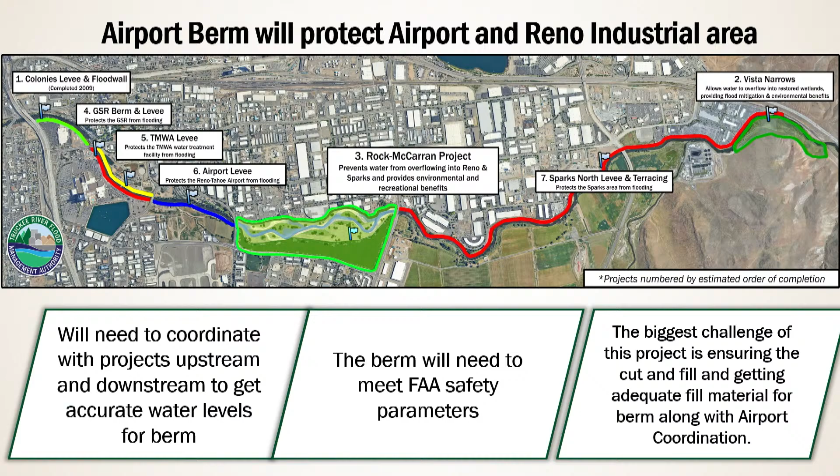Next slide, please. The selection process went out, I believe, on January 6th. In the end, there were 6 firms or teams that applied for this. We had a 7-member team, including one from the airport, so it wasn't all TAC members, that went through all the statements of qualifications and scored them. We found 2 that were a little higher than everybody else.

Then we came back and did an interview on the top 2, and we had a unanimous decision for the firm we chose, which was Kimley Horn. That firm's team also has HDR as well as Crawford and CME as geotechs, and it was very strategic how they put together their team.

CME is the primary geotech for the airport, so they already have all the OKs and know how to work with the airport. Crawford will do a lot of the analysis, so that was smart. And Kimley Horn actually has a large staff of airport specialists here in Reno that do work throughout the West, so they were very adept at this sort of project.

So that's how they won the competition. They also have experience downstream, whereas Crawford has done Rock McCarran, and upstream, HDR is involved in the GSR project. The SOQ asked for an approach, and that approach was matched by what they did in their scope, so the scope matches the SOQ quite well. After negotiations, we came up with what we came up with.

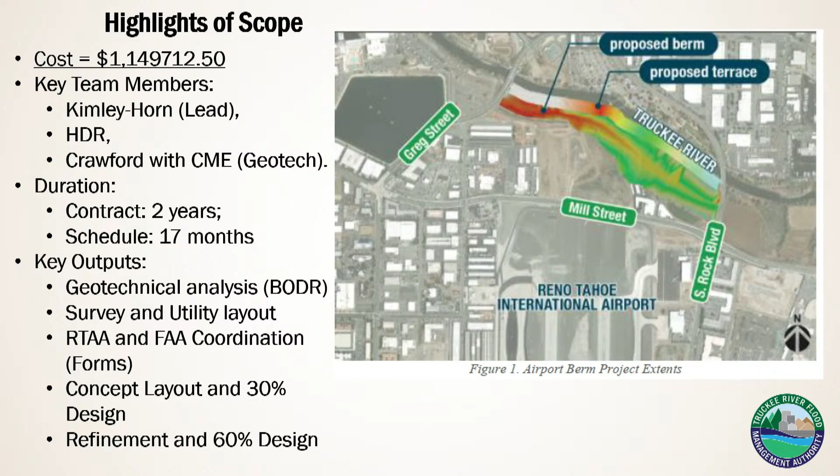I think RTC is surrounded, so we'll help them out.

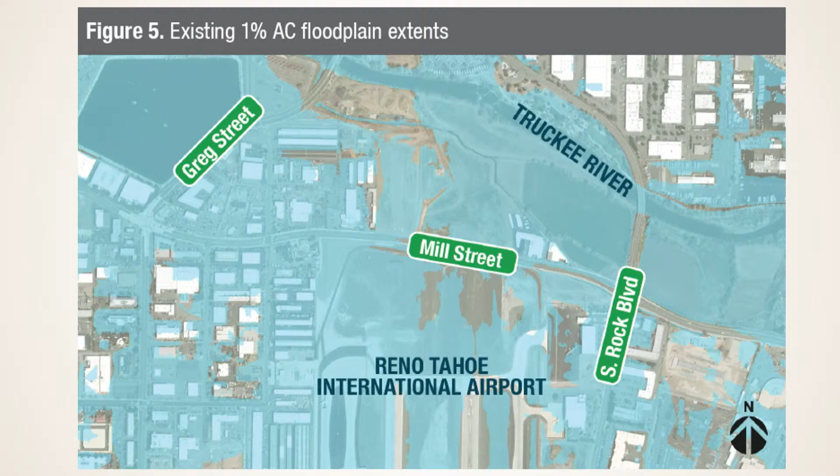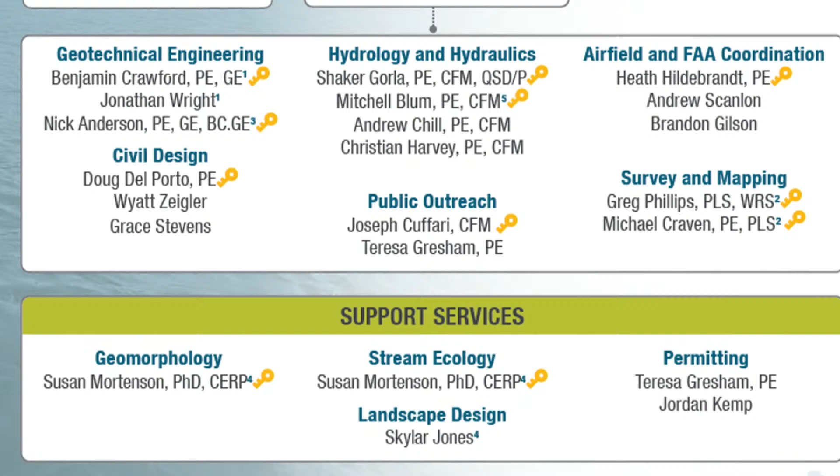Anyways, next slide please. So this is the organizational chart of this project. I don't want to go over it, but it's led by Kimley-Horn, and there is a lot of talent on this team with Truckee River experience, like Crawford, like Mitch Blum from HDR. Heath Hildebrandt has got years and years of airport experience. Like I said, they work throughout the West from their Reno office. So it's kind of a very strong team for this kind of project.

Next slide, please. The schedule is, once again, about a 17-month schedule. It's laid out. We do not have a lot of public interaction like we did with Rock McCarran, because it's kind of behind the gates. It's just building a berm. There is no recreational component because it's behind fences and gates. So the whole thing is really making sure the airport's okay with it, letting the public know what we're doing, and making sure that we have the protection levels right.

A lot has been said about, well, we're spending so much on recreation on Rock McCarran. Well, we're not on some of these other projects for various reasons. So when you average it out, we're not really spending that much on recreation for the whole project. That just came up the other day. I was like, well, that's something to think about, that you can't just look at Rock McCarran, you have to look at the whole project.

Next slide, please. This is the budget and the different components of the budget. I know I put this in the staff report and everything. The big ones are the geotechnical and basically the civil - over half the budget is basically on those two things. And there is a pretty strong component on hydraulic modeling.

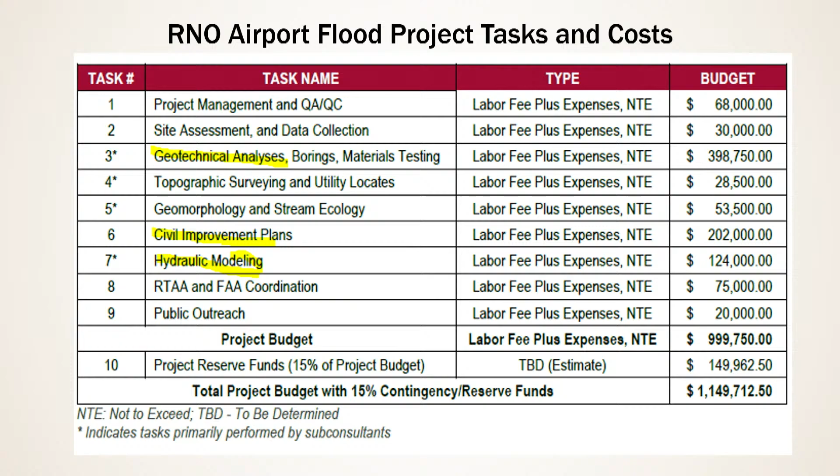This is a not-to-exceed account, so it may not get that high. I wonder if hydraulic modeling will really go that high, since we've kind of solved that for other projects that surround this project. But we'll see. And so anyways, this is what we have for the overall budget.

Next slide, please. So this is it. We have a possible motion. This is from our staff report with adding the dollar amount, that's all. And I'll take any questions about this. Thank you, Director Robison. Are there any questions? Anybody? Yeah, I'll just make a comment.

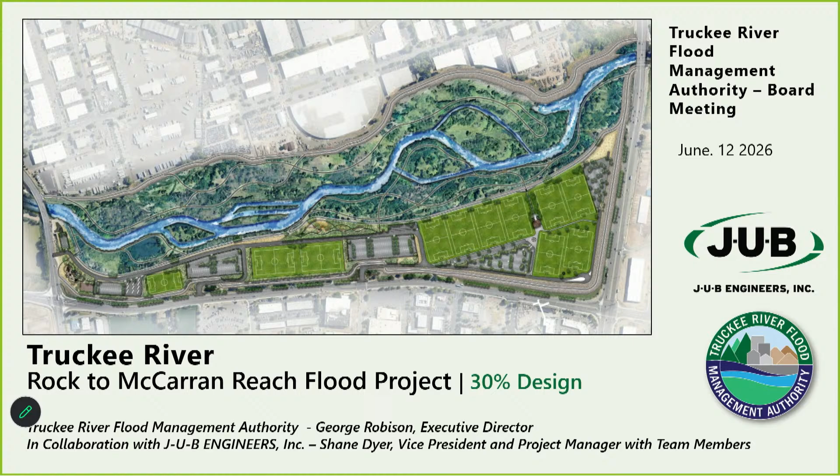I'm going to just take the first few slides and then I'm going to hand it off to Shane Dyer, who is the project leader on this project and also the vice president of JUB. You have them like, bunches of them, okay.

Next slide, please. So the agenda here, and I want to just state the goal: the Rock to McCarran Reach Flood Project is to provide flood mitigation for the 100-year and 117-year event. And because we talk about the park all the time, that seems to get lost in the equation. That is by far the most important part of this.

It protects both the North Bank and the South Bank. It protects the airport, Reno industrial area, and the West Sparks industrial area. It protects a lot. And in addition, we are trying, while we do this, to spread the river out to enhance habitat, geomorphic function, and provide recreational opportunities as well. So we're trying to do multiple use here, but without killing the budget.

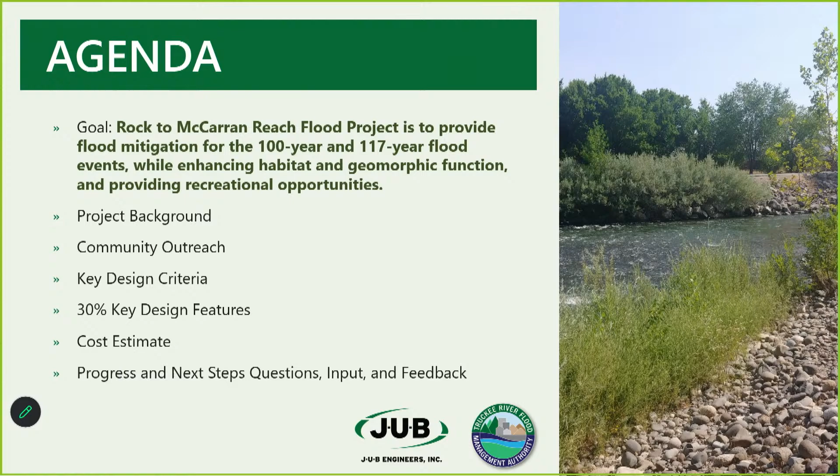Next slide, please. So the alternatives analysis was already done. We went through that. There were literally multiple hundreds of scenarios run, and we had multiple meetings. I'll show you on the next slide how much public input we had. And we came back with a preferred alternative for that.

Then we did the park, where we had two major approaches, and we came back with an alternative on that. The alternative was to have a corridor to move the river for the river part, and in the detention basin, a recreational complex park, and in the river corridor part, more of a natural park. Next slide, please.

So this is the community outreach. I know it's small because there were so many of them. But you can see that even all the way down to the very end here, just on the 3rd of June, we had a community outreach workshop, which used to be our working groups. We had literally many technical advisory committees with public input, working groups, and then an in-person meeting back in 2025.

We received hundreds of comments. It's well over, I believe it's well over 300 at this point when you add all the comments together. And there are themes in those comments. One was there was a real hunger for some sort of park there that had ball fields, a recreational complex. There was also concern for environmental impacts. What we attempted to do with our analysis and everything was to balance those concerns with that hunger or need and come up with something that was cost effective. That was our goal once we heard all those comments.

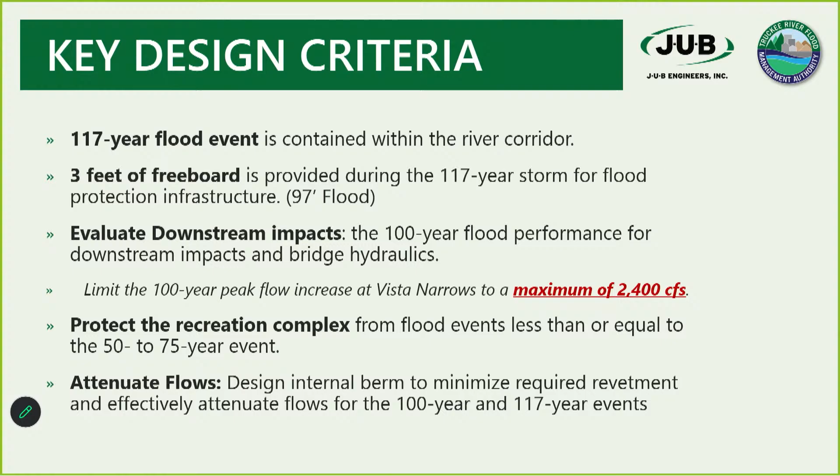Next slide. So I'm going to go over 4 different key design features: the river corridor, the environmental, the transportation, and then get to the nature park and recreation design.

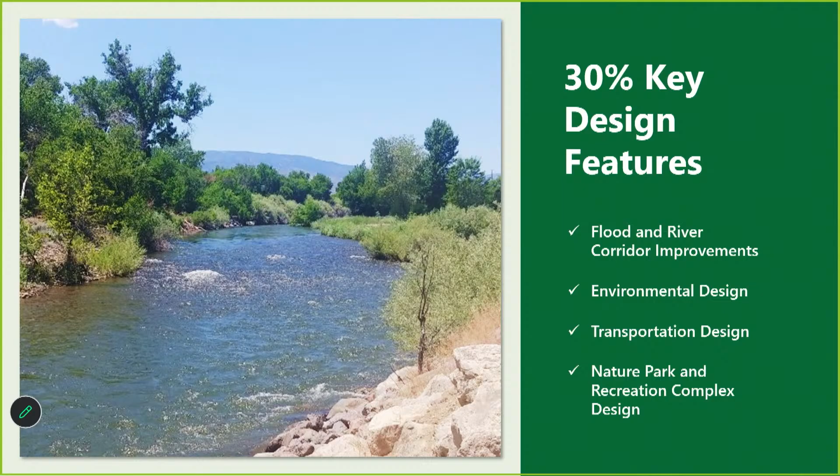In the flood river corridor, the main components include the levees, which have 3 feet of freeboard—I'll show you more about them—the internal berm, which separates the river corridor and the park area, and the geomorphology, which was a huge portion of this: understanding how to create the plan form and geometry of the river, the correct width of the meander belt, and all the geomorphology that comes with that, then optimizing it.

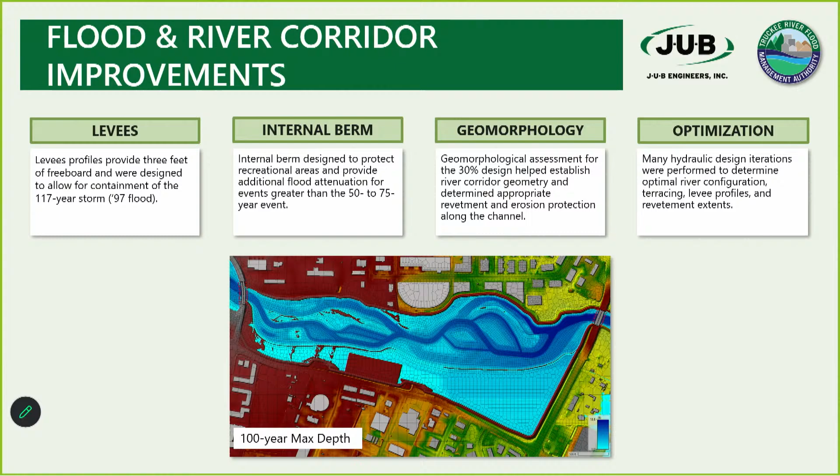We went through tons of iterations to make just the river corridor work. The river corridor is between the internal berm in the middle and north up to the levee against Sparks—so wherever the river is, that's the river corridor.

Stop real quick—the internal berm, where is the walking and biking path? Is that on the north or the internal berm? Both—we have paved paths on the north levee, the internal berm, and the south levee. We'll show some slides that make that more visible.

Next slide. Let me take this. Yeah, go ahead.

I've worked as hard as I can to keep flood walls off this thing, okay—near the rock bridge. Could you turn on your mic? Oh, sorry, please, thank you.

Near the rock bridge, for about 300 feet, there's a situation where it's super crowded. We have a major power line that comes down right there in the middle of everything, and private properties come up really close.

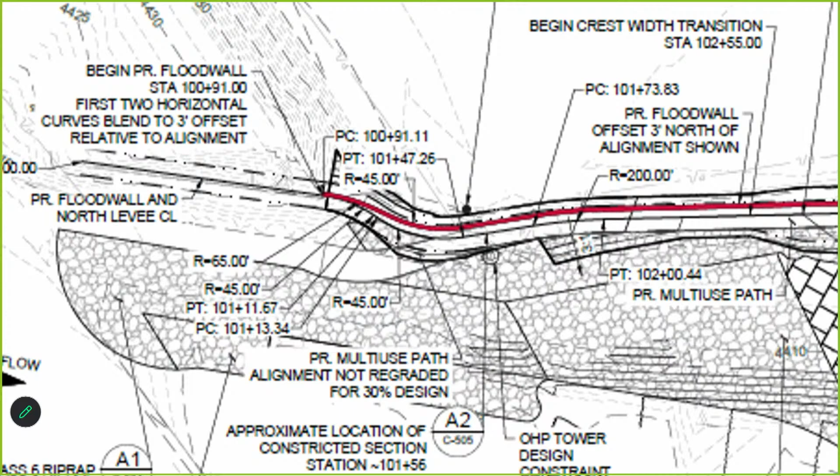So we have all this stuff going on, creating very little room. Originally they had it at about 500 feet. We had a meeting and said we need to really engineer this and make it as short as possible. It's also, in many cases, a hybrid levee-flood wall, so it doesn't pop up too high off the levee—but right by the bridge, for 300 feet, there is a flood wall.

When we do the TRFMA design, there are some places you just cannot do it without a flood wall, against some of the very tight areas where they have the canal and a pond, their major pond. We're trying to build off those with a slight flood wall. There's only a couple of places here and there, but we're trying to minimize them to a few hundred feet here and there over the whole several mile length. But I can't say I can do no flood wall nowhere.

This spot just wasn't able to avoid it. So you know what my issue is—we have this beautiful river that runs through our city, and if we flood wall it off, then we don't have access. That's definitely something we don't want.

What's cool about this 300 feet is there's no access issue. It goes right up against private property, and it goes right up where the bridge is, and there's no access there. The trail is on the inside of the wall, on the riverside, so you see the river, you don't ever get behind a wall. The long-term plan is to put housing along this river, so walling us off is not a good idea.

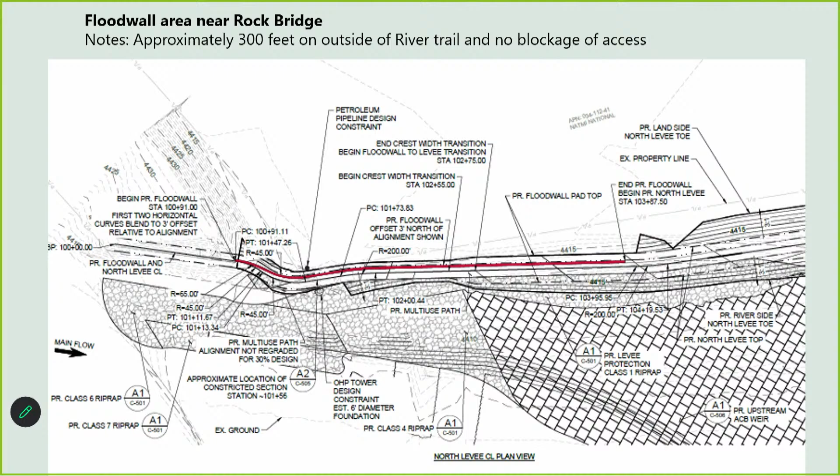So the way we did it in this particular section, we did a small levee and then a little flood wall above it—we couldn't fit a big one. It's big enough that probably the average person could step over it, 2 to 3 feet of just wall on top of a berm. That's good enough for me—if you can step over it and have access to the river, I'm good.

I better double check, but I'm thinking 2 to 3 feet, not 5 or 6 feet—not in this spot. And like I said, even there, it's for 300 feet, there's no access. Even if it was just a levee, there's no access from the north into that area because of the private property and the steep drop from the bridge deck.

All that could change in the future, though. Once this is in, it's in forever—well, let's hope so. One of the big problems is that FedEx's property is right there, and if a developer came in and wanted to replace that portion of levee for 300 feet and remove the flood wall, it would not be hard—they just need more space. So if they owned that land, it would be no problem for them to replace 300 feet of levee.

So as long as we can step over it, I'm good with it. Thank you. Yeah, just on that point, I mean, there is no forever, right?

In Reno, we do have flood walls downtown, but the land is built high enough behind the flood walls that were installed that you can see over it. In fact, right now they're putting in the Riverside berm, elevating it higher by a foot or two, and there's still houses. The difference here is there's a road between the wall and the houses. They're not butted right up to the river, but they're all very well-appointed homes—not mansions, but they have both river view and river access.

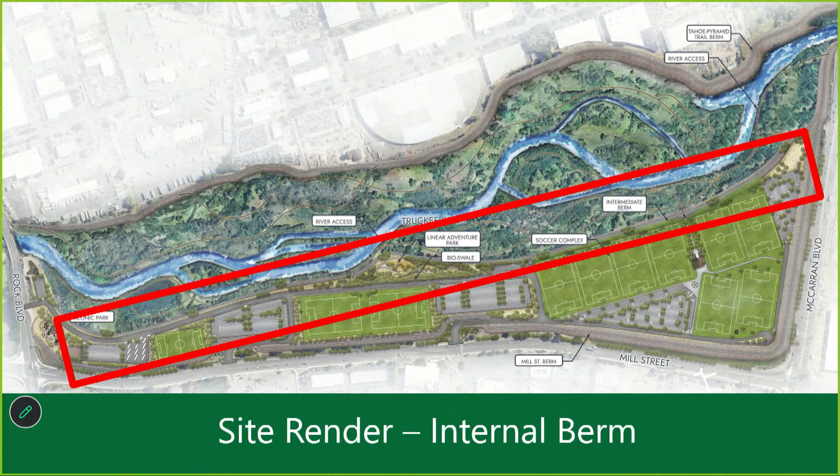Okay, so this one really encompasses that internal berm, and here you can actually start to see the path that you were talking about - we do a better job later showing those in highlights, but you can see that path that goes right down the middle. That's the internal berm. Next slide, this shows us the south levee, and this goes along Mill Street and McCarran.

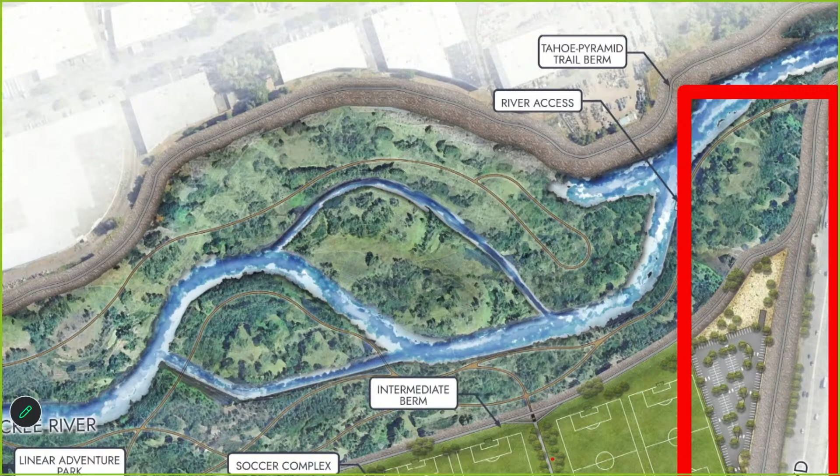So how do you access from the north? If you're on the trail, like the Tahoe Pyramid Trail, you have to come over McCarran, or come down to McCarran, and then there's a pedestrian bridge - you have to cross at that point on McCarran, on the pedestrian bridge. We're actually connecting it with a walkway under McCarran to get back through, because the bridge on McCarran is on the east side, and you have to get across McCarran, so there's no connection.

So we're actually putting a connection in the design, the same way it is on the north, how it goes under - we're doing the same thing on the south side to get back so people can get to the park. So if I'm southbound on McCarran, and we ride our bicycles down there on occasion, do we go under the bridge and then access the south from underneath McCarran, or would I have to cross and go southbound on the northbound side of McCarran?

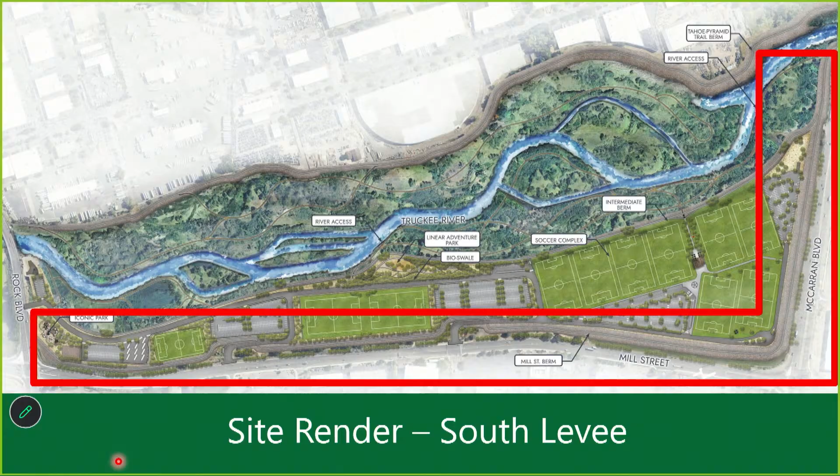You would go on the red pedestrian bridge that's just east of McCarran. So you have to cross, you can't stay on the travel lane side. If you're going southbound on McCarran, there'll be a way to just jump into the park right there - there's going to be an emergency access, ingress/egress, that'll get you right onto the levee top as well. What I'm trying to understand is if I'm taking my family, or Councilman Abbott and I are riding bicycles southbound on McCarran staying on the right-hand side, is there a way for me to access the park without crossing McCarran and then going across the pedestrian bridge on the east side?

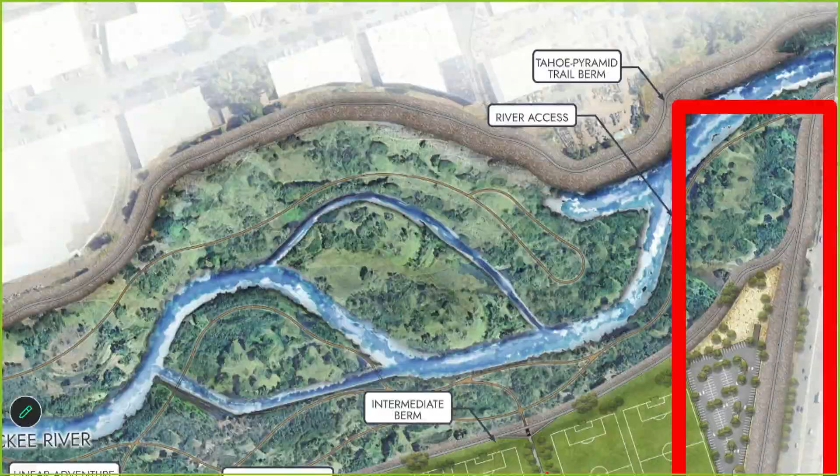I think my understanding of how this is being built is that before you cross the bridge going south, you'd be able to hop off and get on the trail on the north bank. If you want to get to the park with the soccer fields and all, you'd go over the bridge and hop off once you hit the other bank onto that trail. Yeah, you could do that - it sounds like you'd take a right and there'd be emergency access there, you could jump right onto the levee, right there on the right if you're on the road.

And if you wanted to be on the trail instead of the road, you could jump off before the bridge. Ever ridden on McCarran? Yeah, yeah. Yeah, it's not very safe.

I think in the future, if apartments are built, a lot of people will access the North Trail from Glendale Park, then go down to the Red Bridge and cross over from Sparks. That keeps them off road traffic entirely, and you're on a side road to begin with, with parking there.

Where's the Red Bridge, though? It's just east of the McCarran Bridge, literally parallels the pedestrian McCarran bridge on the east side. Yeah, it's a dedicated pedestrian bridge.

Great questions, love them. I'd just want to see some more access. So if you can help me visualize what you're talking about, I'd be happy with that. But if I'm on the travel lane side, the west side of McCarran, traveling south, I don't want to have to cross McCarran's six lanes to access the park.

If you'd have to cross, you'd do it twice, right? If you're on a bike, you'd probably take that emergency entrance, because bikes will be able to do that, but not cars. If you're in a car, you'd probably go around to McCarran and Mill and come in and take the parking, there's hundreds of parking spots. I'm more concerned with pedestrian and bicycling.

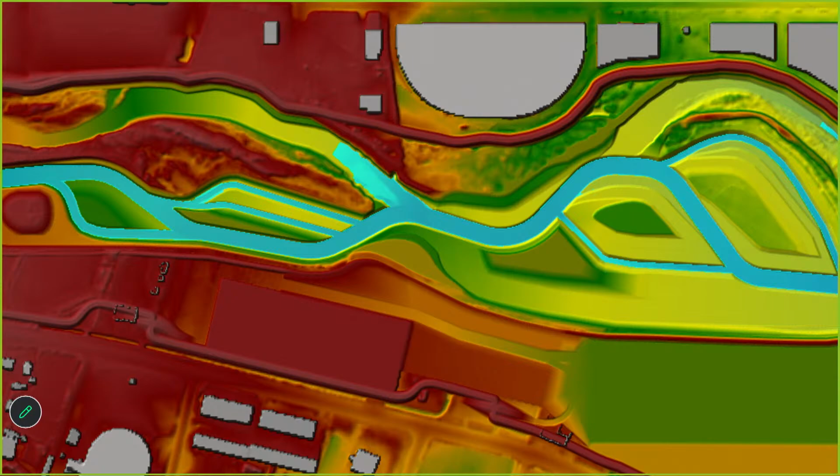Anyways, that's a key thing. Can you show one of the alcoves, Marty? Do you know what I'm talking about there? Yeah, right there off the river, that backwatering - that's called an alcove, and that's a major habitat area. If they ever fully reintroduce cutthroat to that, cutthroat will really use that, especially in the young parts of their life. So it's not just a flood project, it has a lot of other elements to it for habitat and environment.

Thank you, George. And all that was really very intentional - the design is very intentional. The radius on the curves, every aspect of this design is very intentional and well thought out. Some of the highlights are those alcoves and the habitat creation.

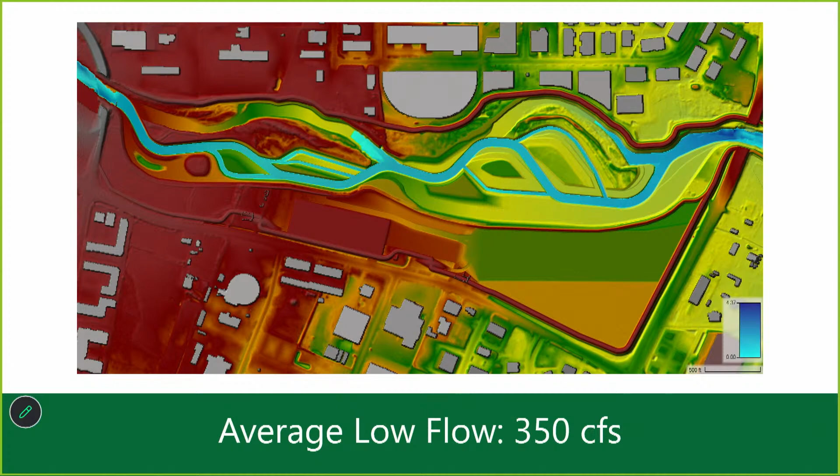Hold on, I want to just say another thing. You see the area in red on the upstream side - Marty, can you just highlight that? It's where that red area is, like a red island. Those are all mature trees that we're keeping. They strategically kept places where we had mature trees to be able to keep as much shading as possible going forward, plus they're planting more trees. But the point is you want to take the areas you have and really enhance them.

The second thing about that island is see how in a 3-year event the water's up. That's going to recharge the aquifers there and allow those trees to thrive and grow, because they will have adequate water most of the time in that area from groundwater recharge. Thank you.

And this is really when we get the entire recreation area activated, 20,000 plus CFS. Just to add, the reason we wait to activate is, one thing, Reno really wanted the parks when they commented to be protected to a certain level. But the other thing is it's more effective to wait and allow all that water to come in during those high flow events, because it attenuates the very highest flows. So it's strategic, and they did lots of runs to optimize that as well - really well thought out with their hydraulic engineering and geomorphology.

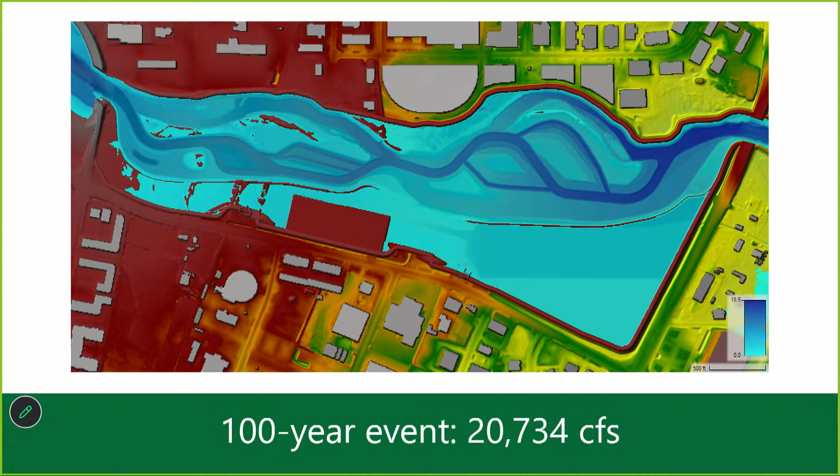So question - so that serves as like a stormwater detention basin? Yes, it fills and then it lets the water out more slowly. Is that what it takes - saying it takes the peak off the top of the hydrograph, so that the top of the flood comes down a little bit? Yeah, good.

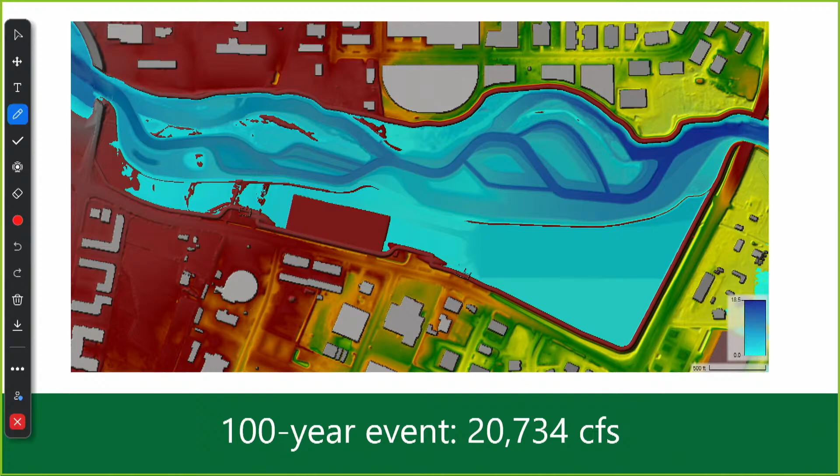What is that flow that would come out the other end? 20,000 - no, like how it reduces it? Yeah, how much does it reduce it? So from 20,000 reduces it to what's coming under the McCarran Bridge? Or was it like 24 and it goes down to 20? I can't remember the most recent figures, but we were dangling figures between 300 and 500 CFS, if I remember right. So it's a substantial reduction from the baseline. The key there is that it could go up a ton, right? So we're keeping it level or below - that's what makes it so challenging. That also helps with our tribal agreement, to not get over 2,400. I would rather stay well below the 2,400 increase.

All right, next slide. So on this one, I wanted to talk about the revetment. This is the erosion protection. You can zoom in there, it's pretty small on this screen.

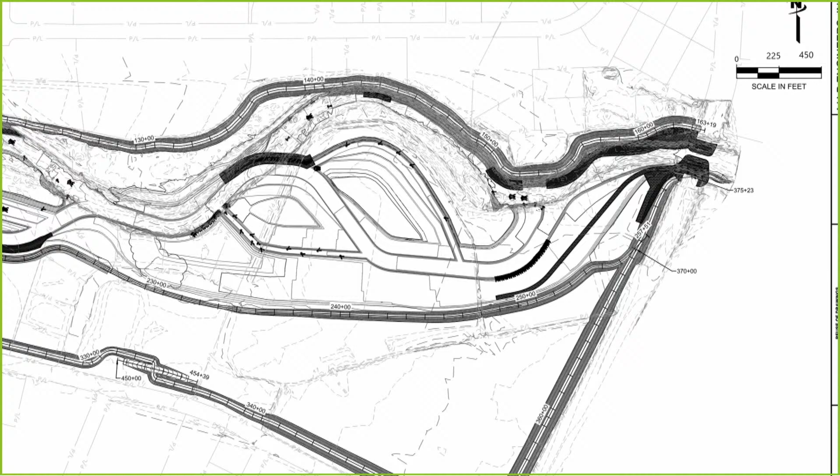Everywhere in black, we worked really hard on reducing the erosion protection to the extent possible. In a lot of these projects you'll see riprap all the way down the levee, all the way down the banks, and we tried to isolate it as best we could. Where we do have it, we're using a lot of bioengineering techniques, like vegetated riprap. We're trying to not do just straight riprap, we're trying to make it a very natural environment.

Where these black areas are, these are our hot spots. These are where we couldn't get the velocity any lower and had to do protection. The next slide goes through what some of those look like.

I want to see right there by the rock bridge, on the far left side of that photo—see how black that is? That's unavoidable because the river is constrained right there because of the bridge, you can't do anything about that. But there were a lot of people who wanted to propose keeping it fairly constrained all the way through. Then you'd have to do more riprap like what's there. Riprap is very expensive, it's poor habitat, and it's ugly. So that's one of the reasons we wanted to minimize that.

Expensive, poor habitat, ugly—I wanted to keep that out of this design as much as we could. Some places it's unavoidable. Every curve of this river was argued over: is that curve too tight, is that curve too loose, to make sure we minimized the level of revetment there. So that's the idea, minimize that as much as possible, but not go too far where you're increasing cost. You want to balance that, but really the idea is to minimize revetment if you can.

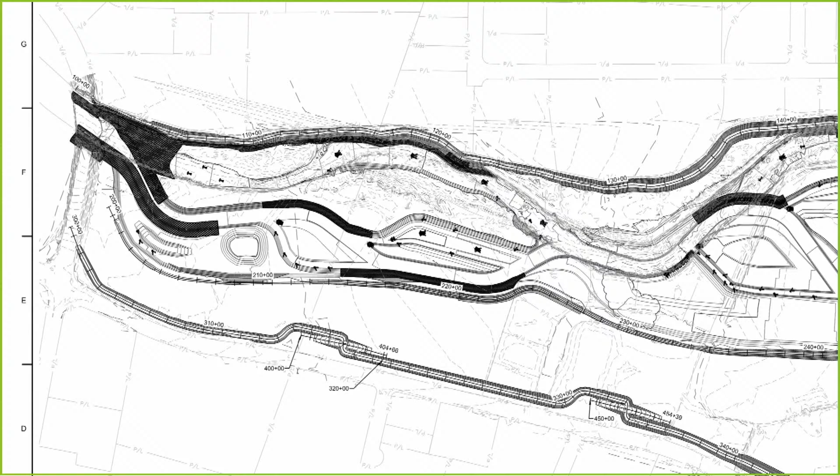Yeah, thank you. Okay, next slide.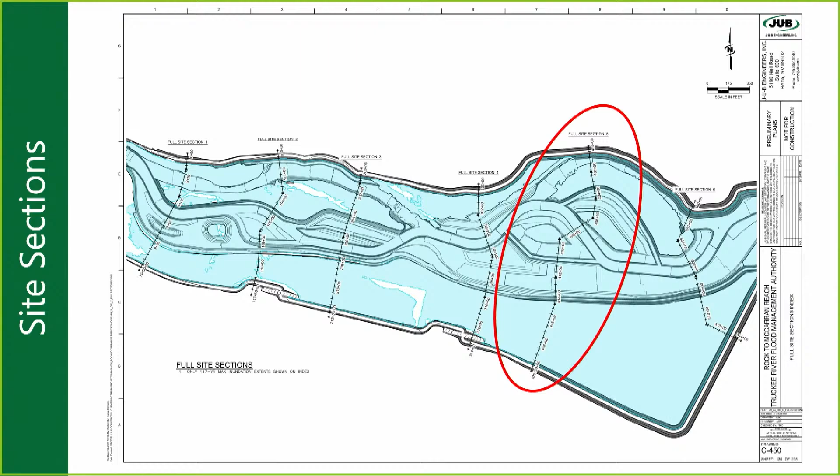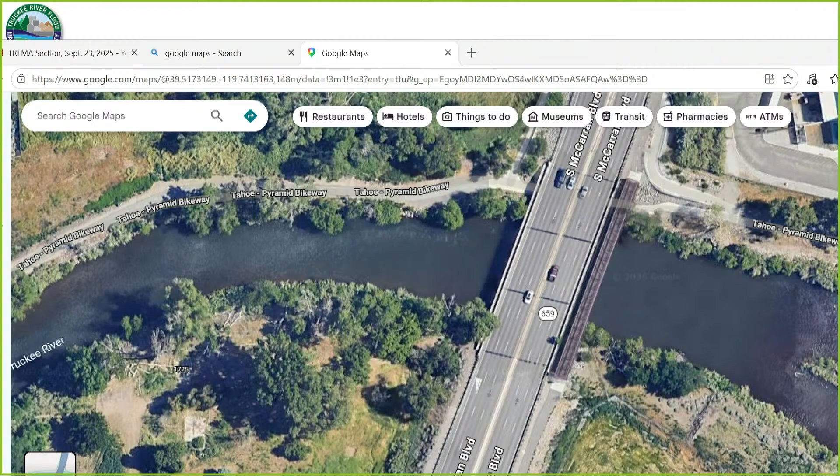And so here we have a video to play from the north to the south, like it was shown on that plan. Are we looking downstream or upstream? This would be looking, I think, downstream. Yep, you're looking downstream for sure.

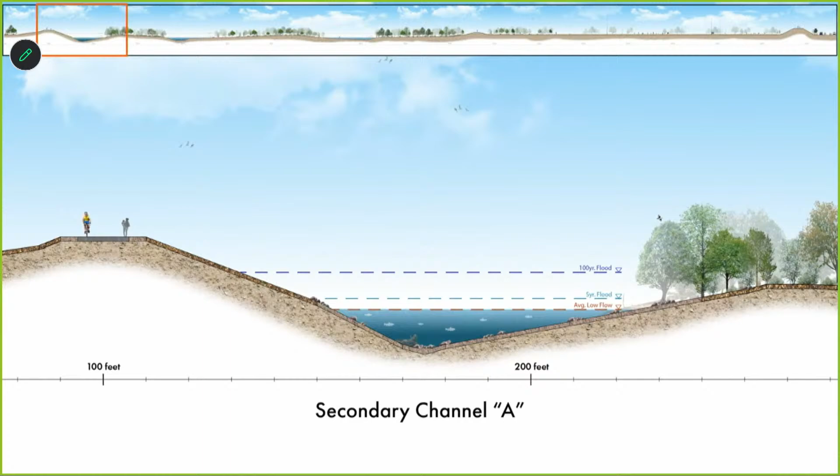So you see that first secondary channel, that's kind of the old river right there. And then you go into the retained old growth tree stand that we have there. Then you get into one of those side channels. Then this is where we have terracing, vegetation terracing. Go ahead.

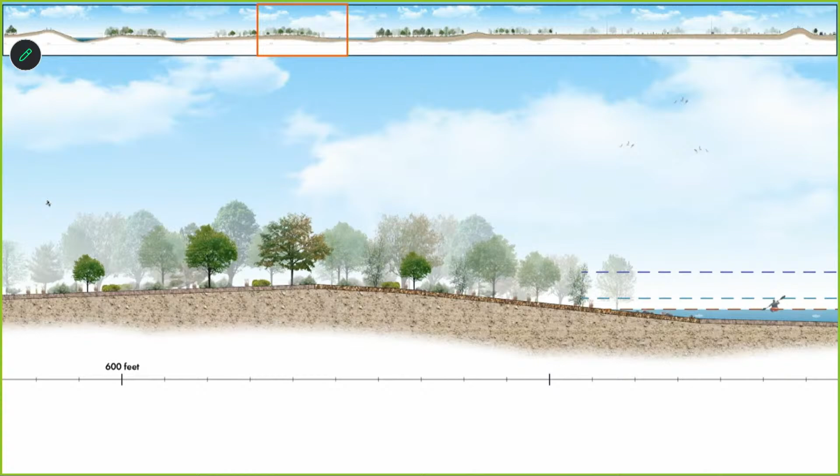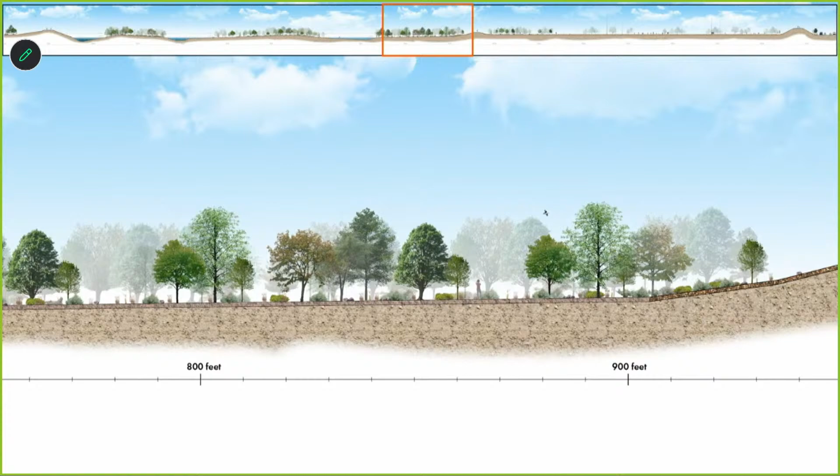Then this is the main channel. It's a huge area. It starts to put it in perspective when you look at it like this. Now there's the internal berm there with the person on top, and the paved path.

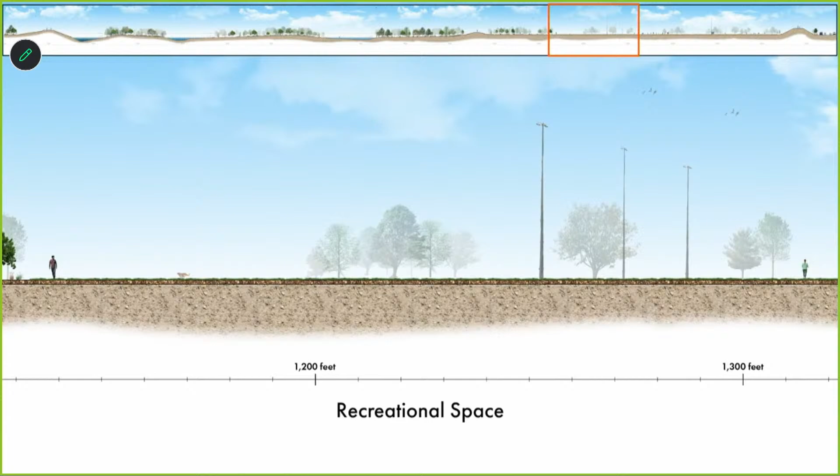And then this gets into the recreational area there. That's what we call the linear park right there, but where that person is, it becomes ball fields. Then you've got the ball fields. And you can see how long that goes for. It's a pretty big space.

And then you've got the south levee along Mill. So I think the idea there is to give you - and this is posted on the TRFMA website as well, so you can study it if you want to - but it gives you an idea of what's going on there as you go across and what it might look like.

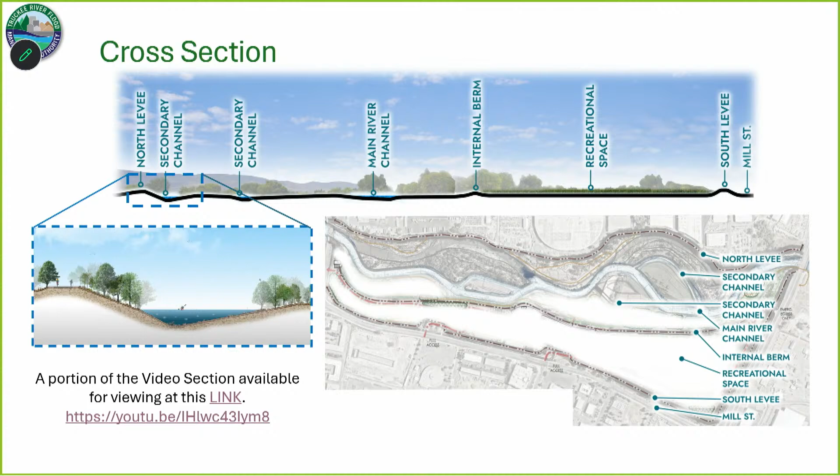Next slide. All right, that's it for the river corridor. We're going to jump into some of the environmental design aspects of the project.

So we started the process with an environmental scan, and they went in and looked at all the existing conditions. They found that the river was very degraded, that the habitat wasn't great, and then they made a whole bunch of recommendations on what we should do as we design the habitat, like using woody material, terracing, backwater channels, and retaining existing vegetation. Those are all things that came out in that scan, and those are things that we did in the design.

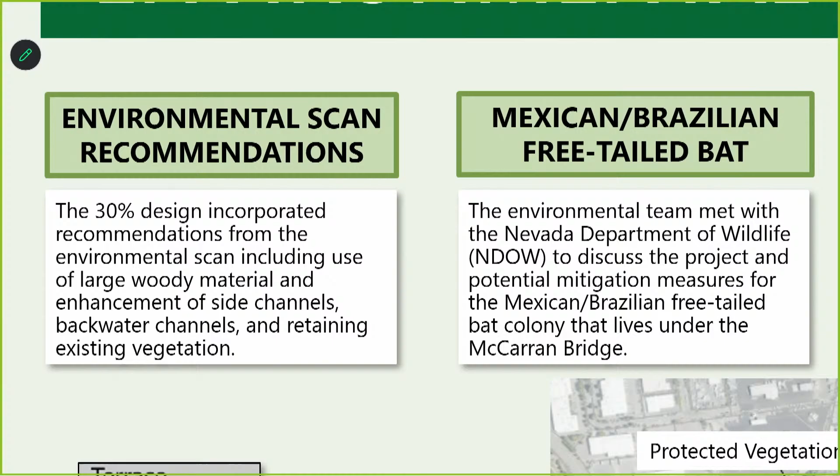One of the big findings, up to 30%, was this Mexican-Brazilian free-tailed bat. We've met with the Department of Wildlife. They're a state-listed species - not threatened or endangered, but state-listed. They live under the McCarran Bridge seasonally, not all the time.

And so we've been working with Department of Wildlife on that path that we are proposing to connect the trails, on what we would need to do to mitigate the situation. Can we do it? The answer so far has been yes, you can do it. There's likely some mitigation that's going to happen. So we don't have finals on that, but they're working closely with us and we have a great relationship with them.

I have a question on that one. When you said the bats are seasonal, so when are they there, what season? They go away in the winter, down to Mexico and Brazil. And they're here in the summer? Yeah, they're here in the summer.

So my question was, later when we get to discussing the recreation elements, one thing I was wondering is the use of the lights, and does that come into play with the bats at all? Yeah, so that was one of the comments - Nevada Department of Wildlife gave us a list of things we need to consider. One of them was lighting. And the closest light that we have proposed is almost 900 feet away, and it's dark sky, so it only points down. So that really wasn't an issue for them.

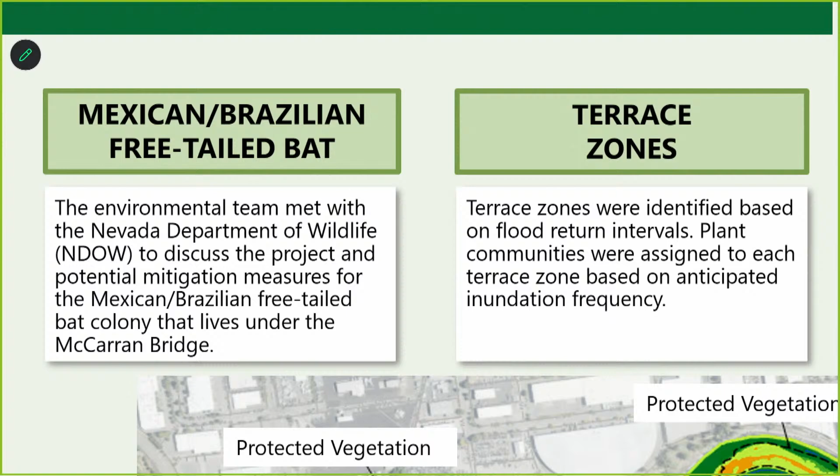But then what about lighting under the bridge for safety in the walkway? Right, so yes, those are considerations we'll have to work through in the final design, right? We're at 30%, but do we not have lights? Well, I had actually thought about that - maybe this park is just open to sunset. If that has to be an accommodation for the bats, even if NDOW talked about if we need the gates.

Lights at path level under the bridge, just so you can see where you're walking, versus lighting up everything, and versus maybe a mitigation of not having lighted fields, just cutting off play at 8 or whatever. One of their initial comments was they want to gate it, and I don't know if that's going to go well, especially in the summer.

I mean, when the bats are there, that's why I was asking - are they there in spring, fall, just the summer? I don't know, so we'll have to work with them. I don't think this is a good plan to gate the path. It'll probably be broken down. Most people don't really care about these things, you know? We care about it, but the average person doesn't even really know about it or know that it's a problem. So just some thoughts. We're working with them, and we'll have more information as the design progresses as to where that's gone.

The terrace zones are a major part of this design - how often they inundate, and then which vegetative communities go in those terrace zones. If you zoom out a little bit, you can see the image here. Really, you can see those terrace zones, like the 0 to 1 and the, it's hard for me to see, 1 to 3 year.

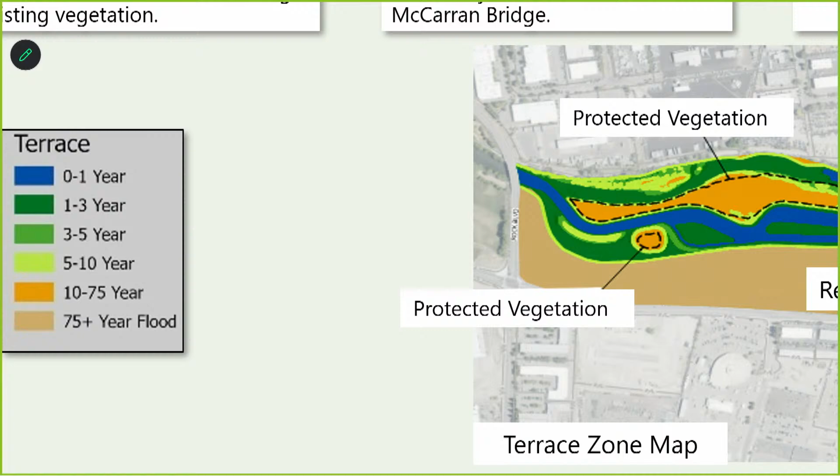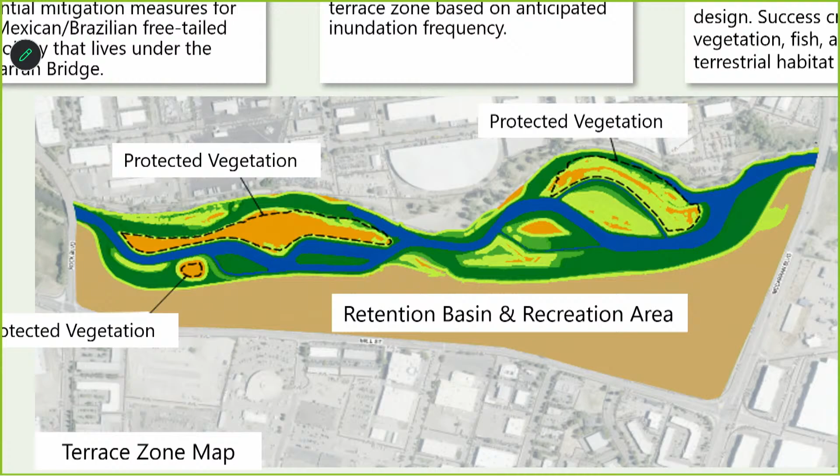So you can kind of see those are the terracing. The terracings were also designed very intentionally, trying to keep as much wetted as we could in the low flows to keep the vegetation. And then you're going to see in a later slide that we had 4 very distinct vegetative designed communities that allow us to have these different habitat zones.

And then the last thing is the monitoring and success criteria. So one of the things that we did is we kind of started at the end. We're like, okay, if this is successful, what is it going to look like from a monitoring perspective? What are we going to have? And so we talked about how we're going to measure success and what that'll look like, and that helps us to formulate the design so that we can be successful with our success criteria.

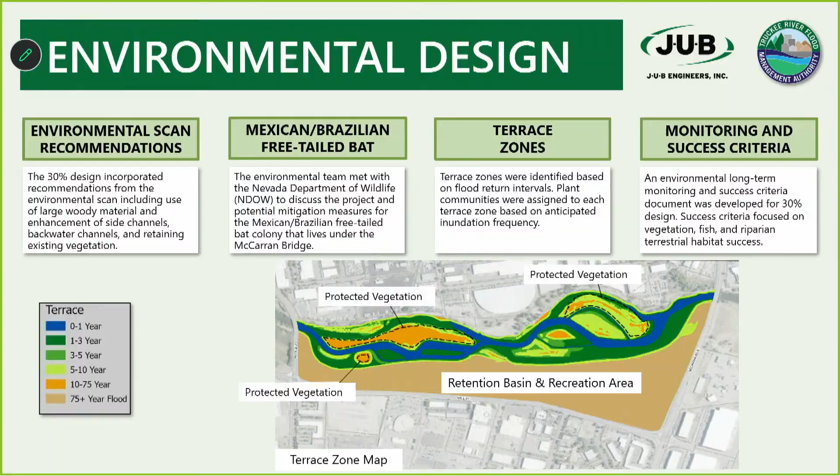Next slide. Okay, this one was just to highlight the vegetation that we worked hard to protect. So these are the mature tree stands that are staying. You can see them there outlined, and those are going to create immediate shading and habitat right after construction. It's great that we don't have to lose those mature tree stands.

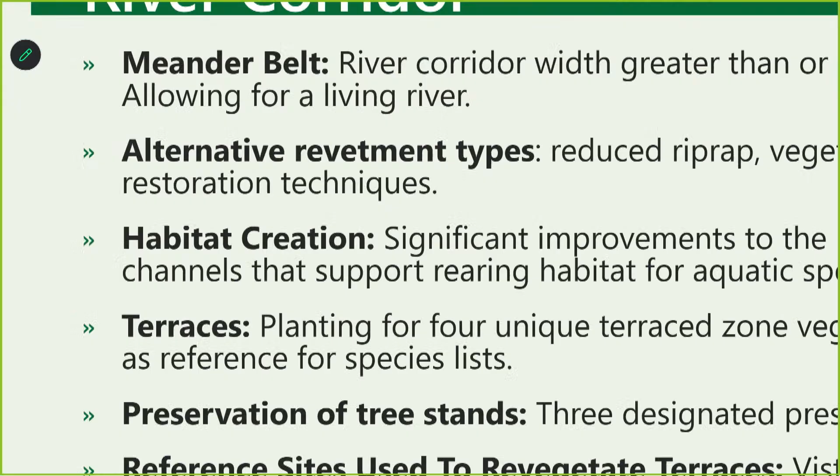All right, the environmental design in the river corridor - obviously the meander belt is a huge aspect of that. So it's 600 to 800 feet based on the river characteristics here, and we were able to meet that the entire length of the river. In an urban setting, it's very rare to be able to get a meander belt when you're doing these projects. We had a unique ability to have as much space as we needed, except right at the bridges - we don't need it there as it has to constrict to go through those bridges.

The alternative revetment types, I've already spoken to this - we're really trying to reduce the riprap and increase the bioengineering. Habitat creation, focused on creating the correct habitat at the correct terraces, and then the terraces having unique terrace zoned and vegetated communities for the species list that we have, the preservation of the tree stands. And then we also used reference sites as we were creating these vegetated terraces, meaning past other projects - 102, McCarran Ranch, Lockwood, Mustang. These are places that have had success with vegetation, so we're using them as references for what kind of plants should we be planting, what was successful, what wasn't successful. So that's part of all this environmental design, packaging it together and putting it forward.

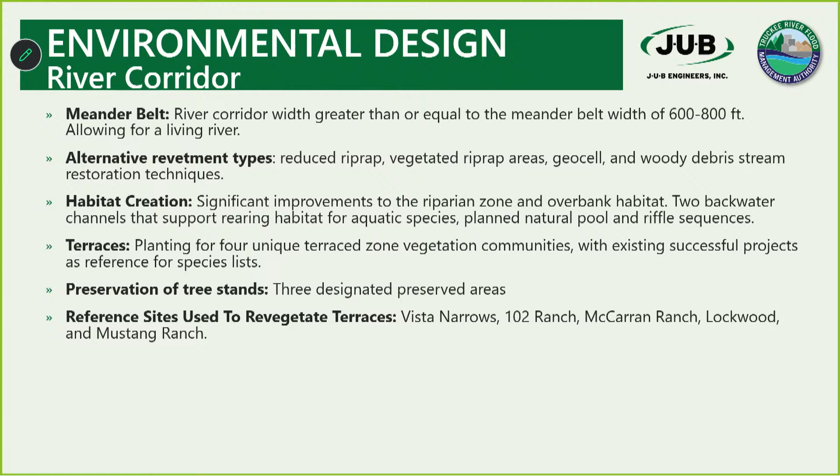Dark sky lighting - obviously we're going to use lighting that only points down and doesn't illuminate everything. That's a big issue in the communities. Treated effluent - we plan to use the treated effluent or secondary water for the irrigation on this. We need to work on that a little bit, but that's the goal, we need to coordinate that. Strategic landscaping - our landscaping crews with Wood Rodgers are working hard to reduce urban heat island effects and just have a really modern and forward-thinking, low-impact design landscaping. So those are aspects of the entire environmental design on the more developed side.

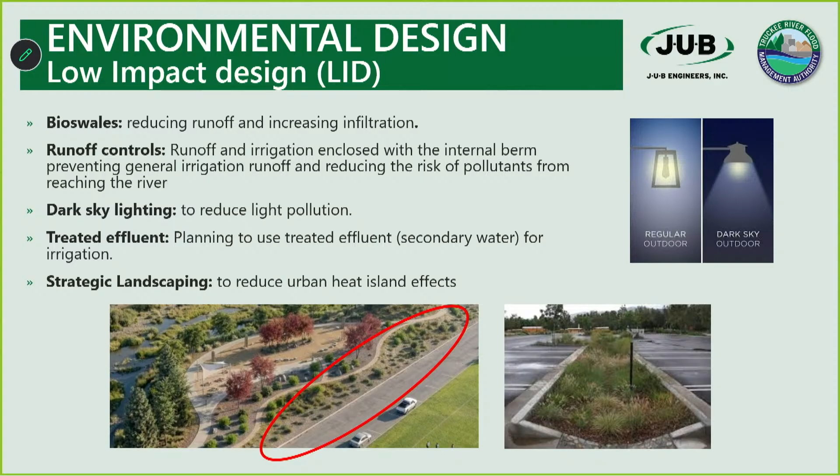What you're really doing here is what we often hear about with xeriscape gardens that are for display and education. A lot of these features here are basically that—they're going to be educating our whole development community about different ways to go about making parking lots, for example. So I really commend you, Shane, and the whole team working on this, because you're actually doing it. You're understanding that we're bringing recreation into a natural environment, and you're doing it in a way that will complement, not harm, the natural environment.

When you spoke about it, I'm going to advocate for building these fields the right way to begin with, where they have to apply far fewer, if any, pesticides, because there's a way to just build the soil properly. We had experts come in and give a design workshop for about 50 people 10 years ago, including Sparks, Reno, and Carson City. People came to learn how to build a field and create the soil layers so you're not constantly having to apply pesticides.

I hope when we get to those parts we can even take this to the next step in terms of designing the recreational areas too. But anyway, kudos. I think you should consider which aspects of this you may want signage for, so when people visit they can learn about some of this stuff and how it works. And I'm not saying it's perfect—even you showed earlier where you had to intersperse concrete with the land, articulated concrete. It's not beautiful, but it works. George earlier said piles of rocks aren't too beautiful either, but you're saying we have to do some of this because it's a way of making the land resist flooding and erosion better. So I think there's things here that will have much wider application in our community.

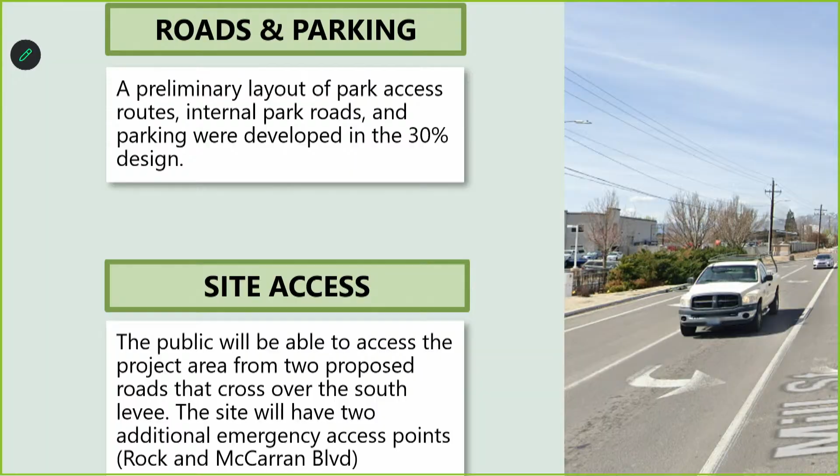Next slide please, Marty. So here you can actually see them—the 2 in green on Mill will be the general way you access the recreation area and the park. And then you've got the emergency access locations on Rock and McCarran shown in red.

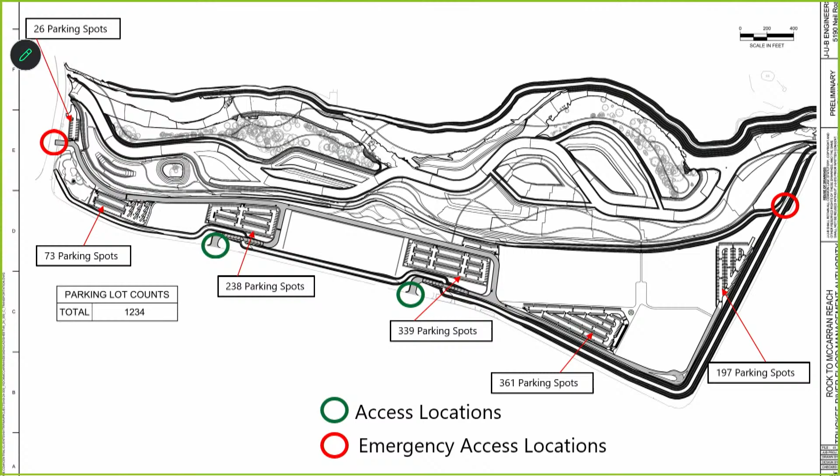Right now it's designed with a significant number of parking spaces in the parking lots. There's been talk about potentially taking a look at that, reducing them, and phasing it based on what kind of sports are being played at those fields. But this is the general layout—you can see where the roads go and how the parking works. So the gridded stuff is the parking, and the fields are the other open areas? Yes, the white is the open area, and the grids are the parking areas. Gotcha.

I don't know if you've been to Golden Eagle much during football events, when sports fields overlap, people show up early, and everyone ends up parking out on the dirt and the riprap. Is it possible with this parking—I know there's discussion about it—to set up remote parking with buses, especially for bigger events? If you're going to have big soccer tournaments, is it possible to have a rental arrangement with somebody like GSR that has a lot of parking nearby, where they could just shuttle people over for a 10-minute shuttle instead of parking right on the fields?

That's just something to look at. I'm not saying that's the best way, but just to reduce this parking issue. And then do a deal where all the people stay at GSR and get bused from the hotel, and Nugget. I think this is going to be a big enhancement for both hotels, both Nugget and GSR.

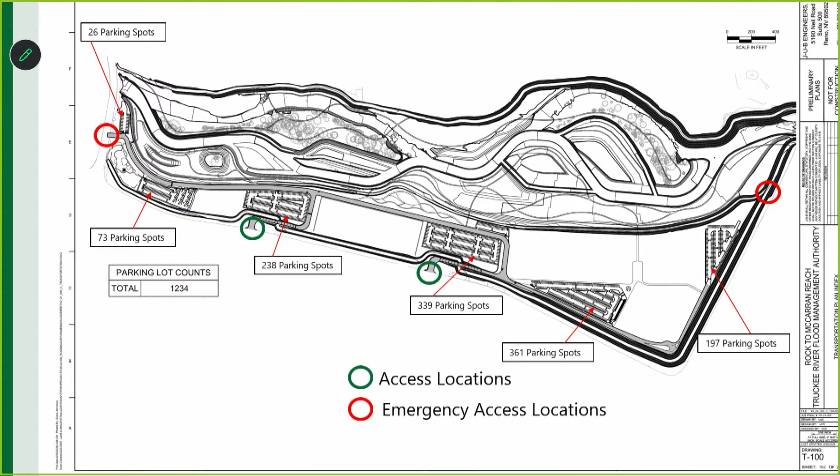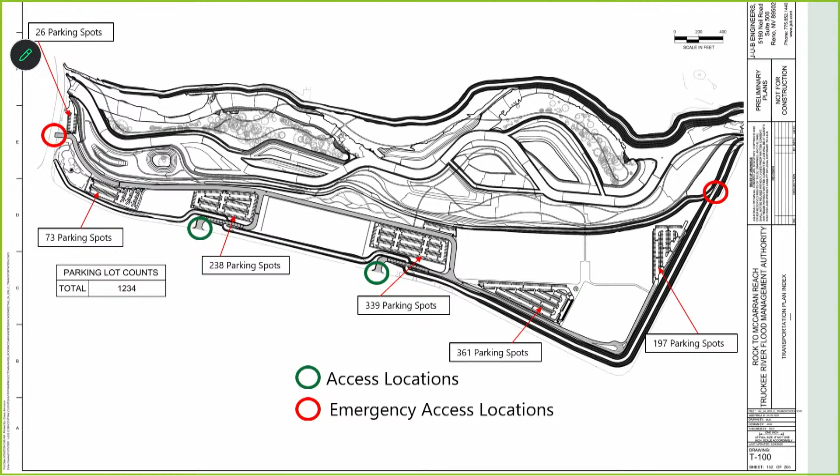All right, next slide there. All right, that was it for the transportation. Now we're just going to jump into the nature park and recreation complex and what we've done.

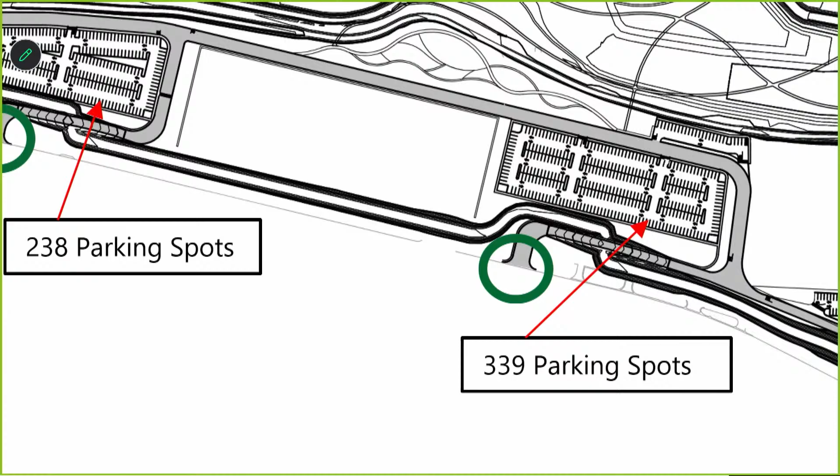Before you leave that, the mayor had the point earlier, just how do you get there and how do you prevent the water from getting out when it's flooding? Can you zoom in there again, into where you enter the parking? Is there a flood wall there or something that closes? See how there's a ramp that goes, you go in and then you ramp up and then back down.

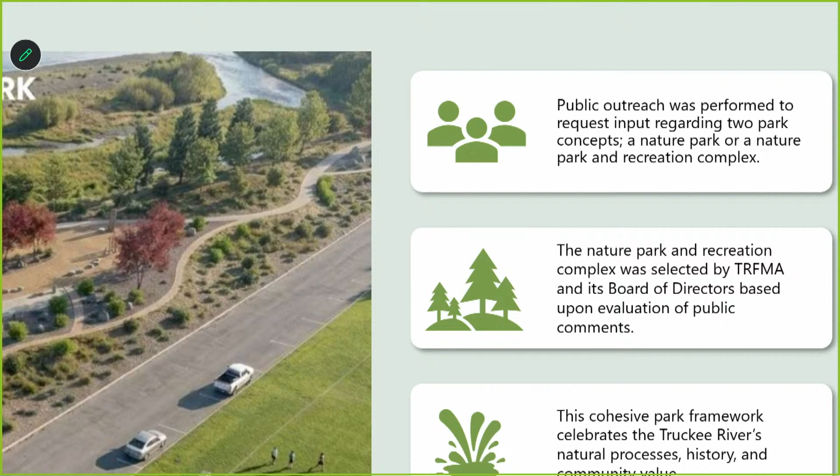All right, so Nature Park, we had the public outreach performed on the two different concepts, the nature park or the recreation complex, and then it was selected through those meetings and then by the TAC, and then eventually you approved this combination park, which was both the nature park and the recreation park. And the idea here is that the theming creates a cohesive park framework that celebrates the Truckee River's natural processes, history, and community value.

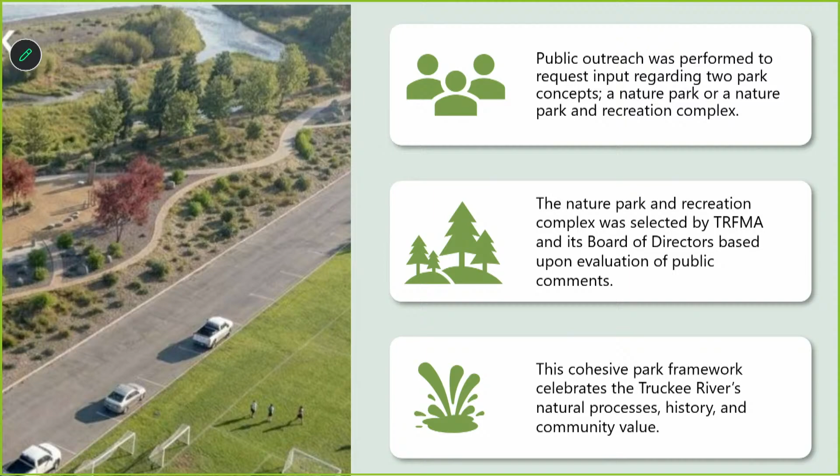Next slide, please. So here's the park. I think you've been looking at pictures of this all day, but it's pretty awesome. It's pretty small there, but you can kind of see you have the river access. There's a bunch of trails. We're going to have another slide that shows them better.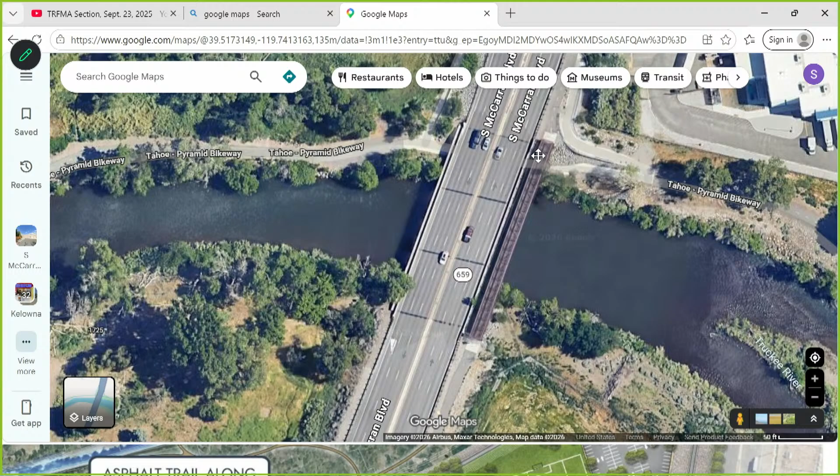Now that we're talking about that piece of it, like Mayor Lawson said, if you're on the west side of McCarran traveling south, how would you access it? I think you would just roll - there's an emergency access point there, you'll just roll right into the park. If you're on a bike, talking about walking or biking, yes, if you're on McCarran you would just roll right in and be right on the levee. There'll be an access point right there if you're on the west side going south. If you're in a car, you have to go around.

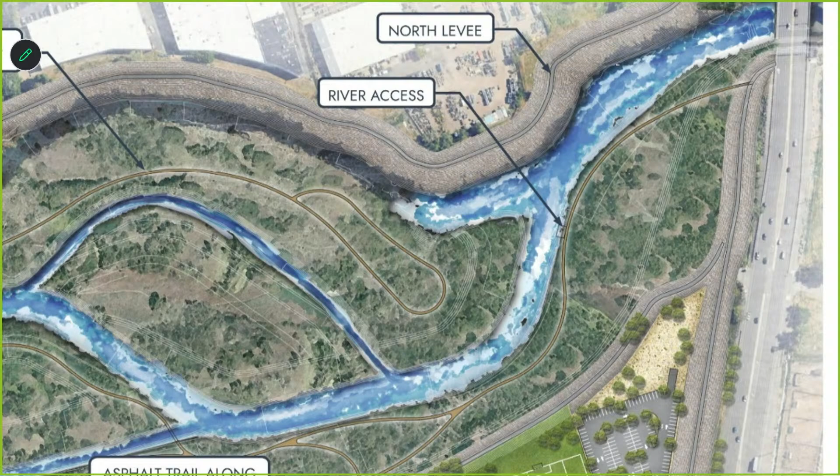There's a bridge that goes across. Can you go to the one with all the trails? I think that's going to help a lot more than this. Now zoom into that area, yes - so you can see where that's underneath there.

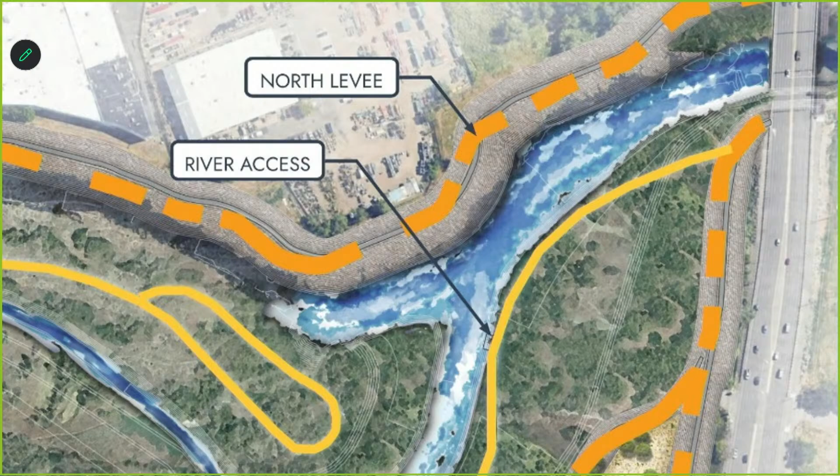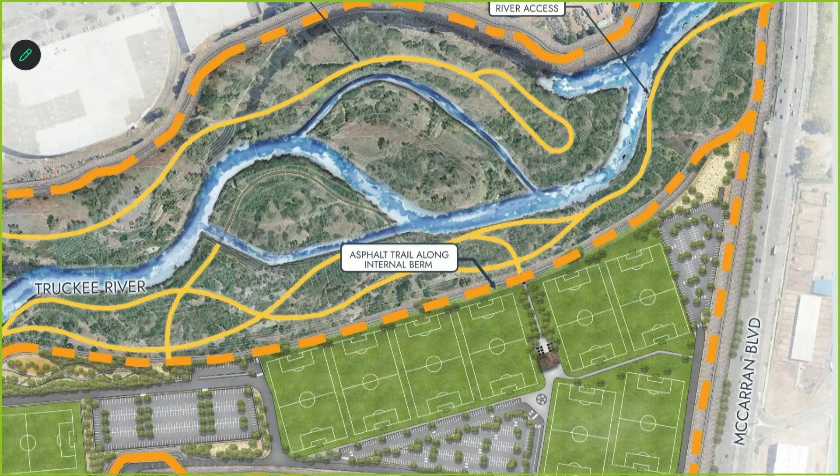Then there's that emergency access about halfway down - it's orange, you can see that orange thing, that means it's paved. There's an existing access point where we don't have to fight with DOT over it - it's where the gate to the old monastery is. Right there, there's an existing access point already on McCarran, so we don't have to deal with that. That's the old road to the monastery. But how do I get across the river - do I have to be on McCarran? No, underneath the bridge there, see where the orange is going underneath the bridge? Is there a trail on the bridge south, underneath there? That's what I'm telling you. I see what you're saying.

You're saying, are we improving McCarran? We're not. What I'm saying is if I'm on the west side traveling south, I have to get back on McCarran on my bicycle or walking, or cross across the street to the east. No, go across the pedestrian bridge and then cross back to the west again. Isn't there a trail underneath the bridge? But how do I get from the north to the south?

There is a red pedestrian bridge, a dedicated trail. Already, see it right there? Yeah, if I'm going southbound, I need to cross McCarran to get to that pedestrian path. Then you would get off before and go under, get off on the right. I think I see what you're saying now, is if I'm with my family, get off and go under the bridge on the north side of the bridge.

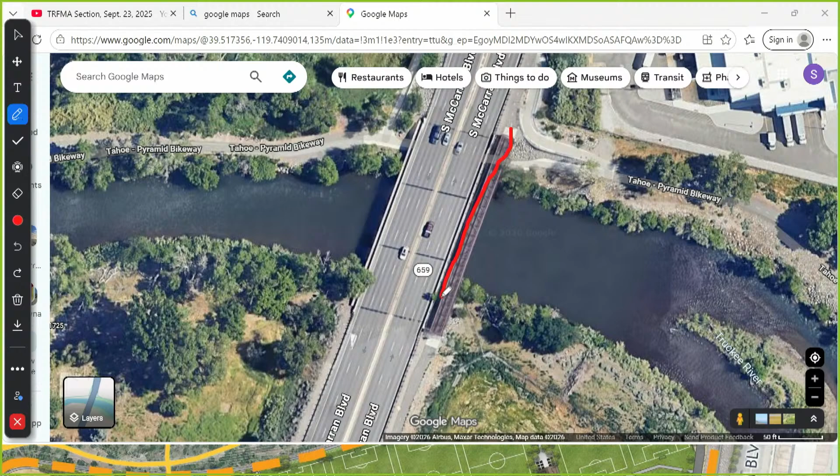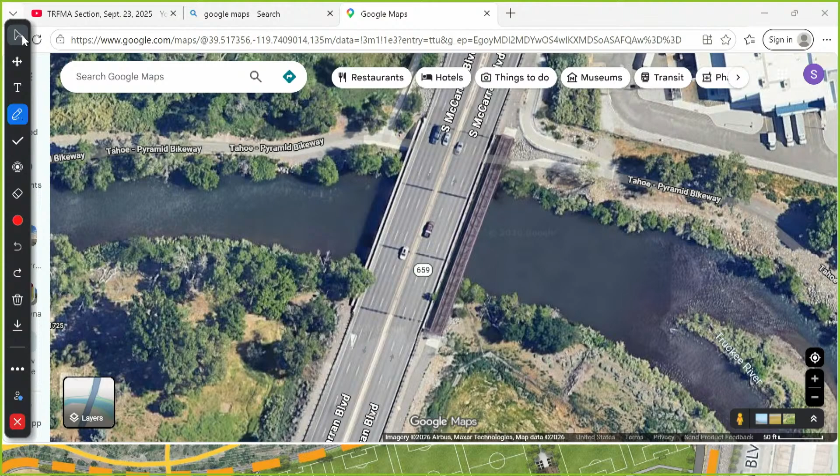So you don't have to cross McCarran, get off. Right, I mean what we're talking about is access to the park. You can also get off, turn right when you're on McCarran, get off, go under. Well, I think what we may want to look at, Shane, is some sort of off-ramp. They're already there, I've walked down that. It's not a real off-ramp, but I have walked down there. There is actually a pedestrian bridge on the west side as well, but it's very narrow.

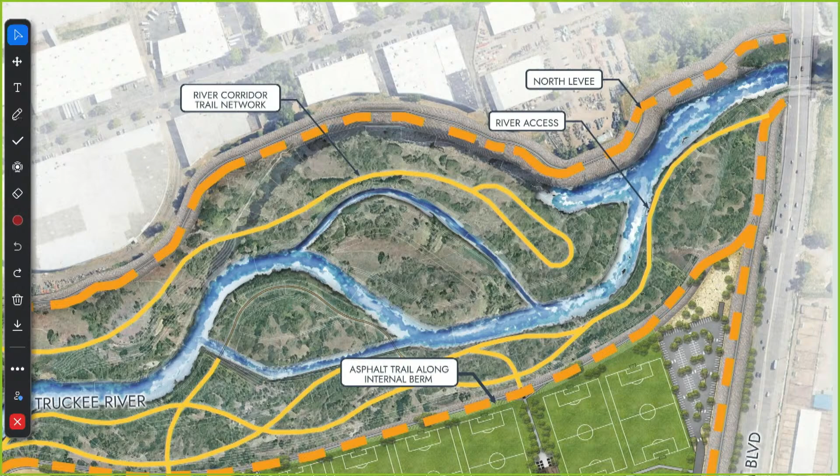We'll have to do some improvements on McCarran. Just give me access so I don't have to cross McCarran and then cross it again to get to the park if I'm walking or biking. But do you mind if you go under the bridge to do it? However we can get from the north to the south, that's fine. It's just, do you see what my point is? No, I think we need to have an off-ramp there on the north side of the bridge.

And if I may, also, the bike lane along McCarran is only 3 feet wide. So if you're on the trail coming from the east, there's a ramp that takes you up to McCarran, parallels it so you can cross that pedestrian bridge. The problem is, if you're coming from that direction and you want to get to the park on the south side, the trail's currently on the north side. You can cross the pedestrian bridge, but then you've got to have some way to navigate back across McCarran to get back onto the west side.

There's nothing under currently. But there's going to be a trail under the bridge. That's the answer. That was not clear. Okay, well I think there... right there, down and under, that curlicue there. Okay, yeah, that's exactly what it is, right there. That's what was designed, the red.

Okay, that was what my clarification was, so I don't have to get on McCarran to cross the river. No, if you've ever ridden your bicycle down McCarran, it's a dangerous sport. That's why we only have emergency access on McCarran, for instance. We don't want cars turning into that. You bet, finally caught on. Clear as mud there.

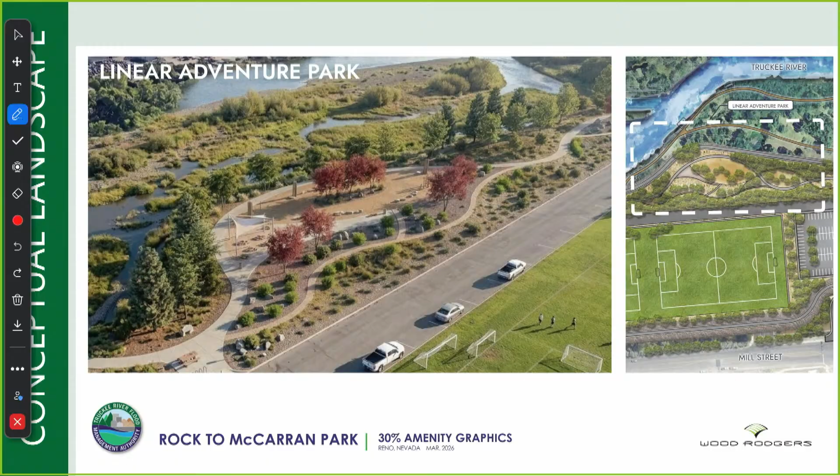Next slide. So these are things so that you're just not looking at a wall, a bare levee berm - just something to make it look good. No trees though? Looks good. There won't be any trees, they got a little excited - there's a couple trees on that levee, but those aren't allowed.

And then the next slide is the path. Taking a zoom-out look at this extensive trail system, the big dashed bold orange is the paved paths, and the smaller yellow is the nature trails in the river corridor.

What's the width of those? The paved paths on top are 10 feet wide, and the nature paths are just for walking, anywhere. We don't have the design done on those yet, but it's like 3 to 4 feet, compacted earth paths.

I'm thinking about places to hide for homeless and unhoused. Yeah, and how do you patrol that?

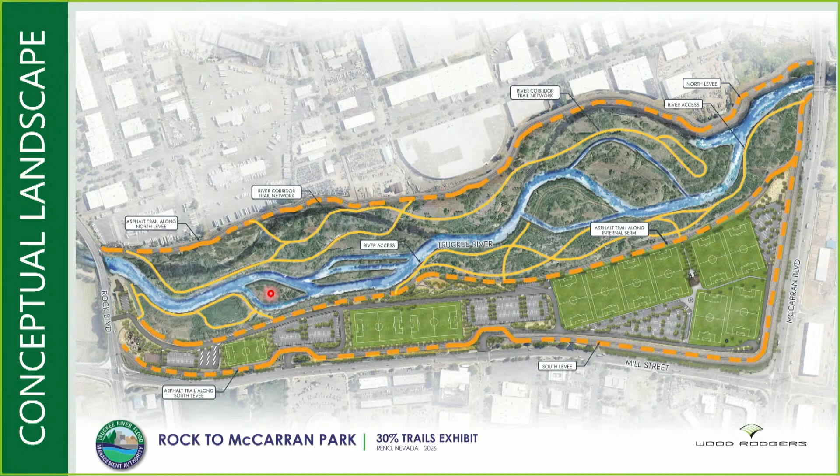This is a cool design, though. Isn't it great? Yes. Exciting.

Next slide, please. That is it. This is the base versus the...

Okay, so I'm going to go ahead and talk about this for a minute. When the original 30% design came out, it came out quite high, and the recreational cost was quite high. So I basically said, let's go back to the drawing board. And I promised, if it's too much money, we can phase this, we can work for other funding sources, we can do whatever.

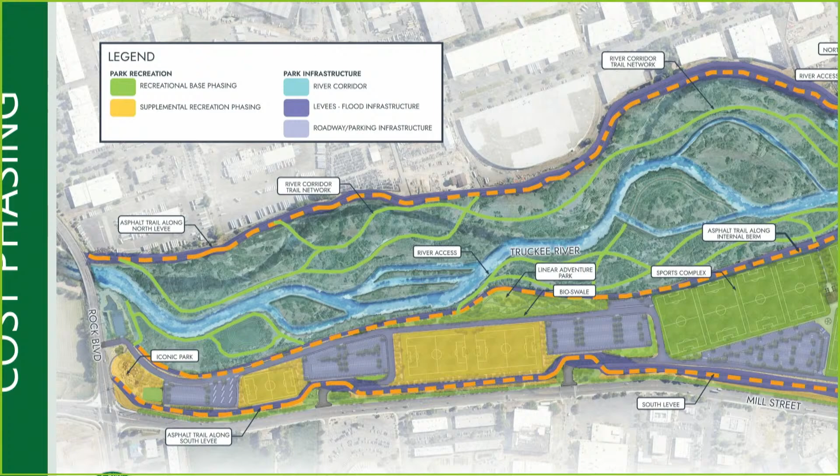So what we did here is we created a phasing plan based on what we thought was important for the first phase. First phase keeps all 8 fields. They are grass seed fields, so they'd have that soil amendment rather than roll-on grass turf, which is more expensive. The Adventure Park is still there, but not the iconic park that's in yellow over there. That iconic park is actually on dry ground even during high floods, so you can do a conventional park there, but that's in phase 2.

Then these other 2 fields that are more east-west are also in the later phase. The lighting is also in a later phase. The lighting is about $3.5 million alone, just for the fixtures.

So all of that, what we did is we got this down to a base cost of about 92 million. And actually, we reduced other costs by reducing revetments and some other things by really looking at every bend in the river. And we got this cost down to, with everything and all these park features, full supplemental was...

I believe it was what, 104 something? 105? What was it, with supplemental? I'm sitting here talking off the top of my head. Yeah, that's what we remember. You got it, yeah, right. So anyways, that's the idea here.

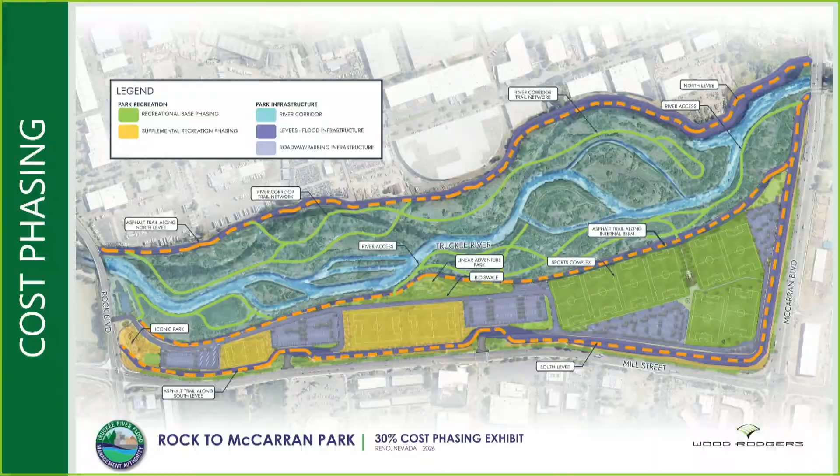From 93 to 105 or whatever, something in that range. When you look at the total cost of the project, I think we may be being penny wise and pound foolish. Often what I've noted in government projects is when we do a phasing thing, we go, well, we'll do this part later, we don't do this part. Or we go, well, we'll rely on nonprofits. It's hard for them to raise $10 million.

We're talking about they have to raise 10 million cash. When you're bonding for it, you're adding a little bit of an increase in payment each year, but to get to your total. So I'm not advocating one way or the other, but I am saying I wouldn't just take it off the table and say not doable. I think you have to look at the financing costs when we get there.

Are interest rates low? Are they high? Where are they? Are we looking at 30-year, 40-year, only 20-year? All the things that will go into the financing package. I'm just suggesting it may be too early to make that decision.

And then I also want to say, I was kind of confused when you were explaining it. Are you saying move forward with the green and hold the yellow, or move forward with the yellow and hold the green? The ultimate decision of whether to go full on and do the supplemental, or do a phased approach, is in the future.

Because we don't know—like, what if we win that grant? And that puts $20 million more in our budget, then I can bond that, or not me, but you can. And ultimately, I have no say in that decision. It's your decision, as a board. All I'm trying to do is inform you.

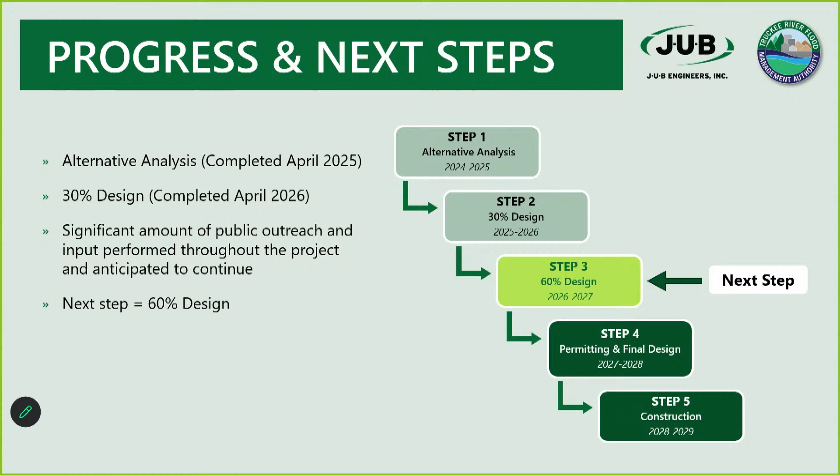We feel like we could have a draft to TRFMA by the end of this year, and then there'll be some back and forth with the TAC and the stakeholders. So sometime early next year we could have some things to present to you.

Another thing is we will have to talk about the in-holding. If you look at this schedule, once we go to construction, we will have to start dealing with the in-holding. We've been waiting for a government grant, and I'm going to ask some questions when I'm in Washington about it. If it's not viable or not on the horizon, we may just need to go and get that property. I don't want to say any more about that because I'll get slapped by the lawyer over there. But anyway, that's another consideration with the schedule.

Yeah, thanks for laying that out. Is there any public comment on this item? Seeing none, with that I'll look for a motion from the board.

I'm happy to make a motion if you could put that back up. So I'd make a motion to continue to 60% design, considering the recommendations we've discussed, evaluating.

Okay, we have a motion from Director Dewar. Is there a second? Second from Mayor Lawson. All those in favor say aye. Aye. Any opposed? Motion passes unanimously.

Good job, by the way. Thank you. This is great work, great visuals for the future. That's awesome, I want to say that too. I already said it, but I'm going to say it again. Shane, your whole team, the public input process, knitting these things together.